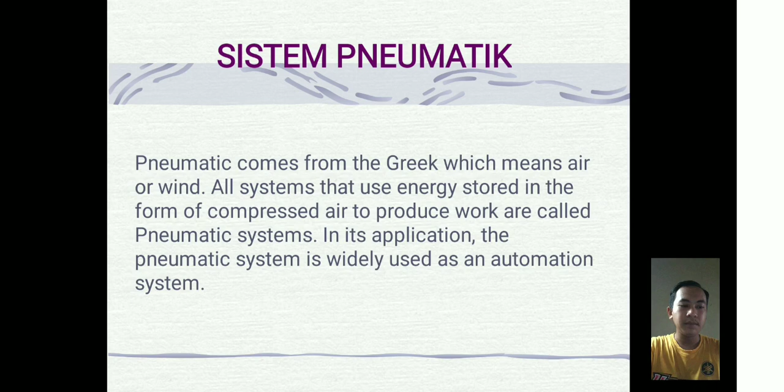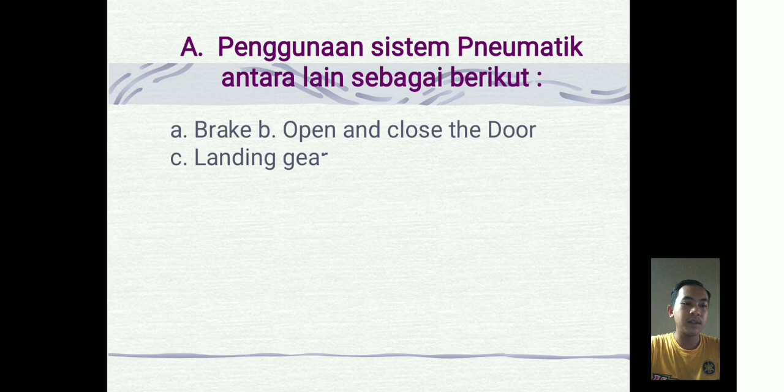Uses include: brake, open and close the door, landing gear removal and towing, and other applications.

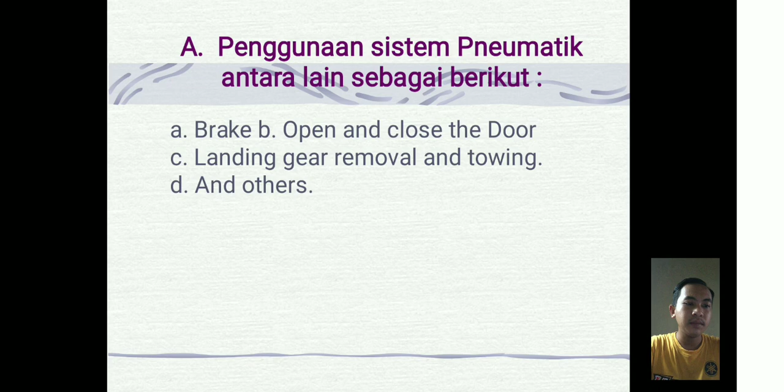Advantages of the pneumatic system include: the work fluid is easy to move and transfer, can be stored properly, relatively small pressure drop compared to hydraulic system, the viscosity of the fluid is slimmer so that friction is negligible, and it is safe against fire.

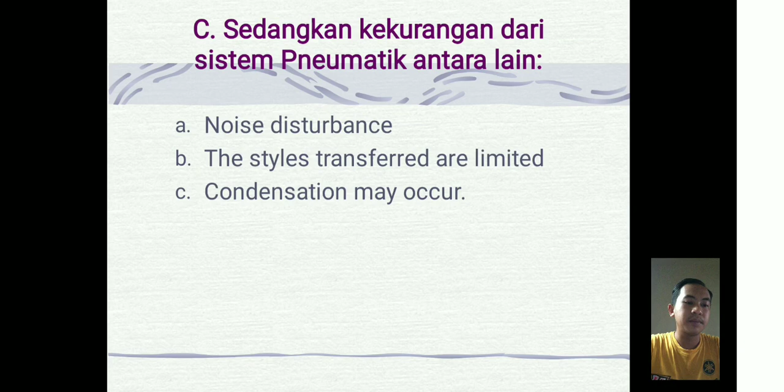High pressure system: air is usually stored in metal tubes, air storage cylinders, in the pressure range from 1000 to 3000 psi.

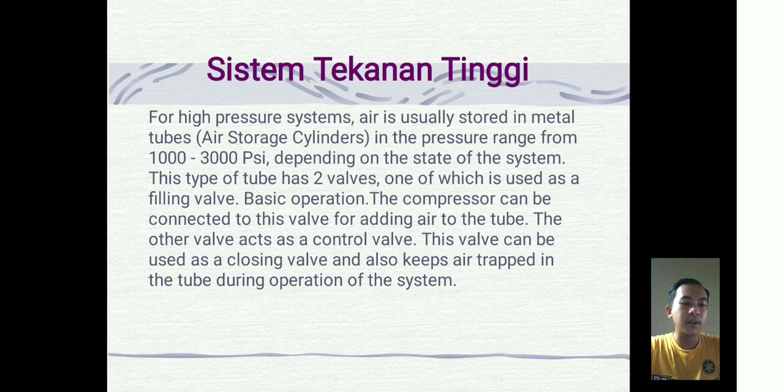Depending on the state of the system, this type of tube has two valves, one of which is used as a filling valve. Basic operation: the compressor can be connected to this valve for adding air to the tube. The other valve acts as a control valve, which can be used as a closing valve and also keep air trapped in the tube during operation of the system.

Medium pressure system: the medium pressure pneumatic system has a pressure range between 100 and 150 psi. Usually it doesn't use an air tube. This system generally takes compressed air direct from the compressor motor.

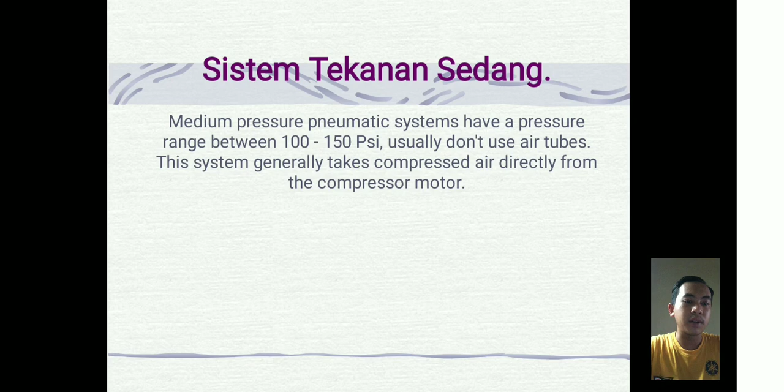Low pressure system: low air pressure is obtained from the vane type air pump. This air pump results in air pressure continuous with a pressure of 1 to 10 psi to the pneumatic system.

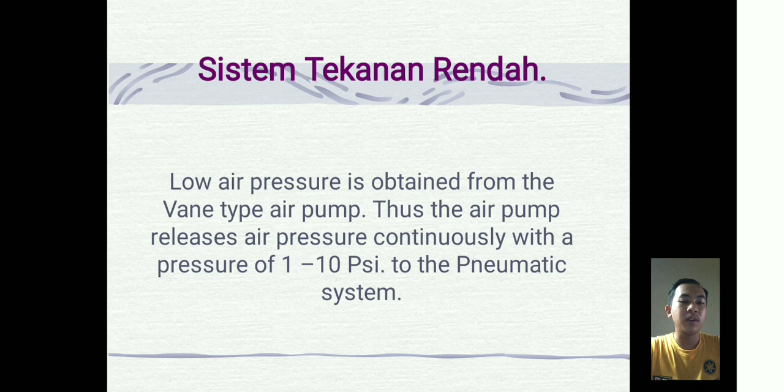Components of the pneumatic system: Compressor - used to suck air in the atmosphere and store into a storage tank or receiver. The air condition in the atmosphere is influenced by temperature and pressure.

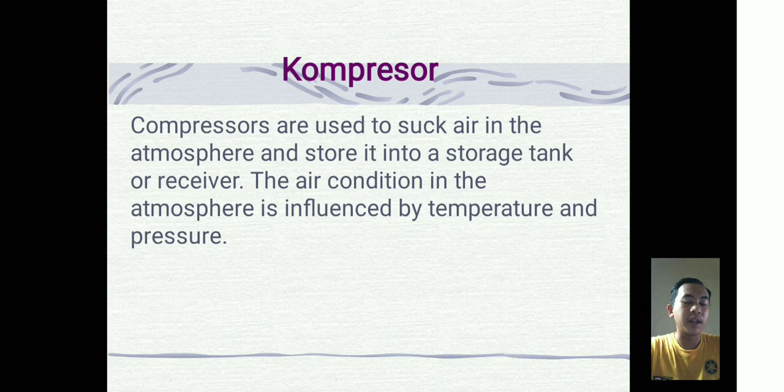Oil and water trap: the function of the oil and water trap is to separate oil and water from the air entering the compressor. The percentage of water is very small in the air that enters the pneumatic system, but it can be a serious cause of system malfunction.

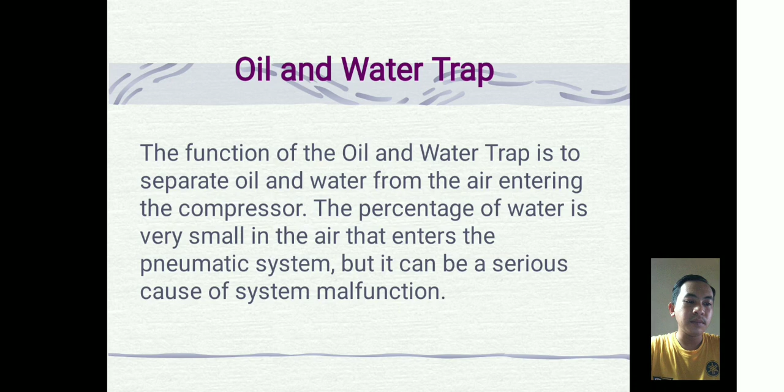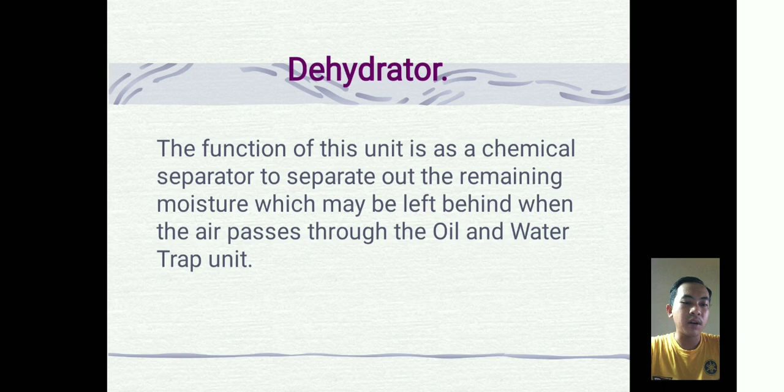Dehydrator: the function of this unit is a chemical separator to separate out the remaining moisture which might be left behind when the air passes through the oil and water trap unit.

The air filter: after the compressed air passes through the oil and water trap unit and the dehydrator unit, finally the compressed air will pass through the filter to separate the air from the possibility of dust and dirt which may be in the air.

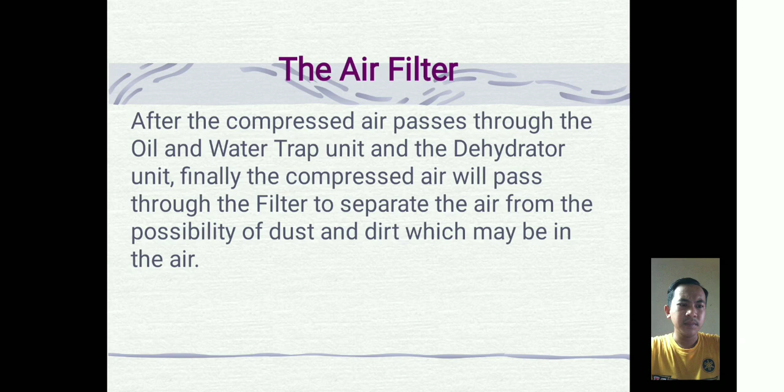Pressure regulator: ready to enter air pressure system at high pressure, adds pressure to the chamber and exerts a load on the piston.

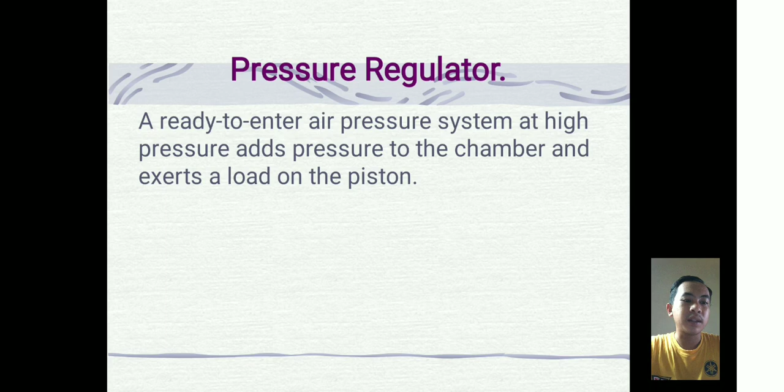Restrictor: restrictor is a type of valve controller used in the pneumatic system. There are two types of restrictor, namely fixed orifice and variable restrictor type.

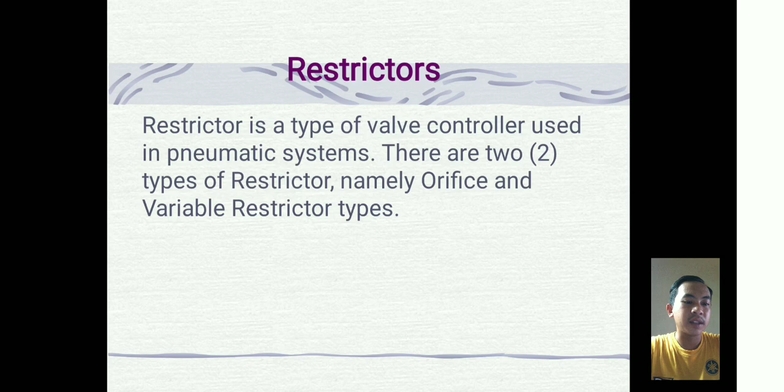Pneumatic system maintenance: maintenance consists of repairing, looking for trouble, cleaning and installing components, and testing operation.

Precautions to keep the system clean: the filter and components must always be cleaned of metal particles which can cause wear on the component.

Every installation of pneumatic components must be kept clean and protected with covering tape or dust covers immediately after cleaning, and ensure when replacing components so that no metal particle enters the system.

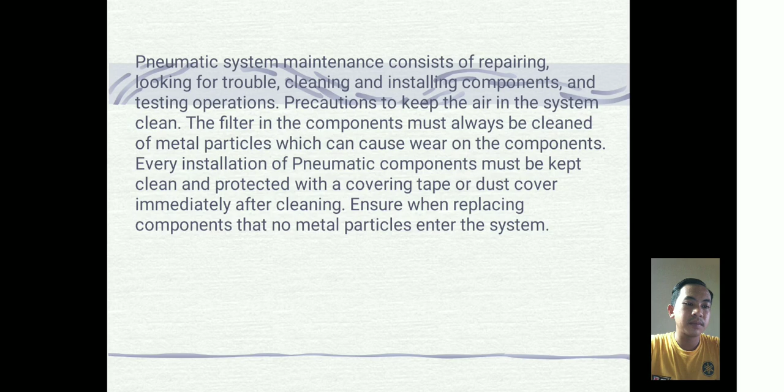Hydraulics is the science of fluid movement, not limited to water fluid. In reality, in our daily life, we use the hydraulic principle every time we drink water, and every time we hit the brake, we apply the hydraulic principle.

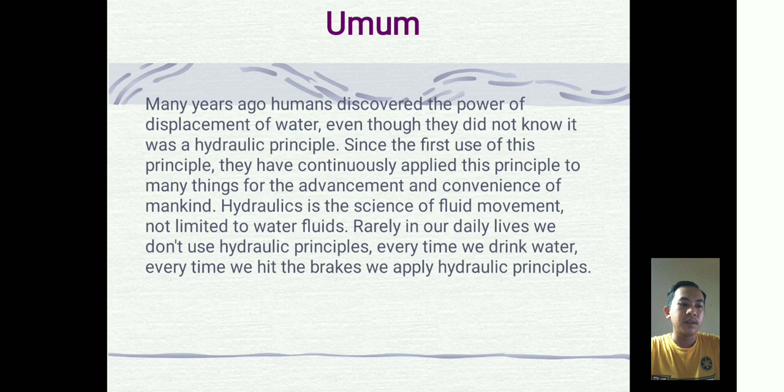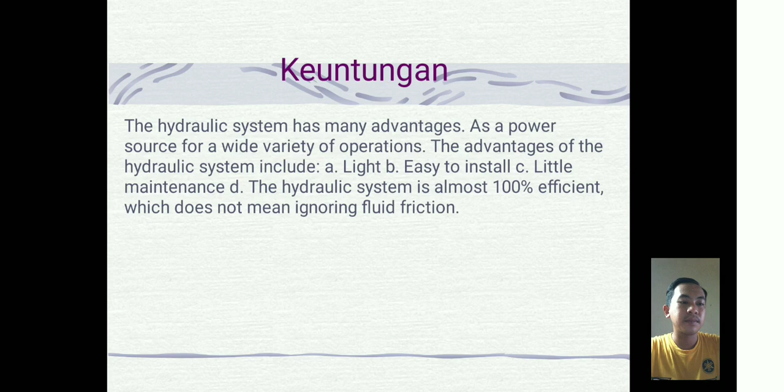Understanding hydraulics: to understand the principle of hydraulics, one must first know the calculations and several laws related to the hydraulic principle.